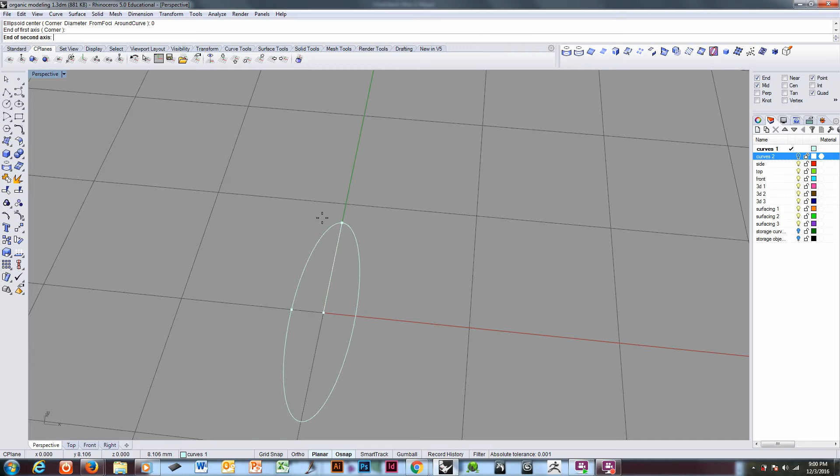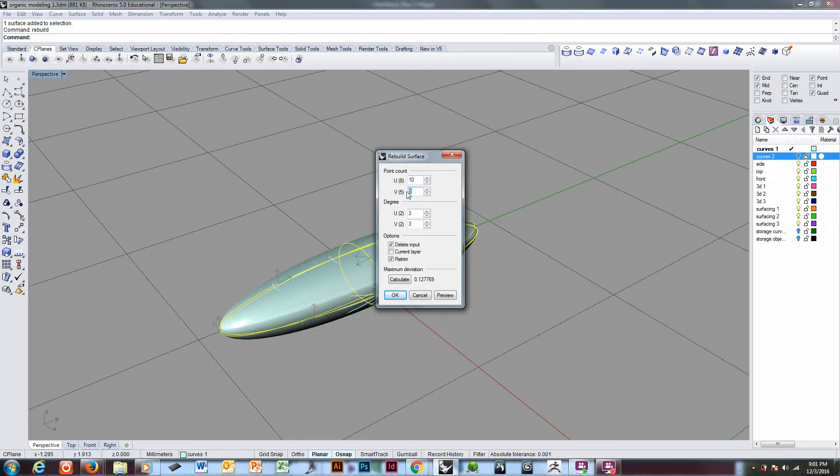It gives you an object, something like this, and then you would edit point or control point edit this object. To really edit it, you would have to rebuild it first, because the points at this level are not very useful. So when you work with a solid like this, generally you're going to be doing control point editing. You're going to need to rebuild it. Okay, so something like this.

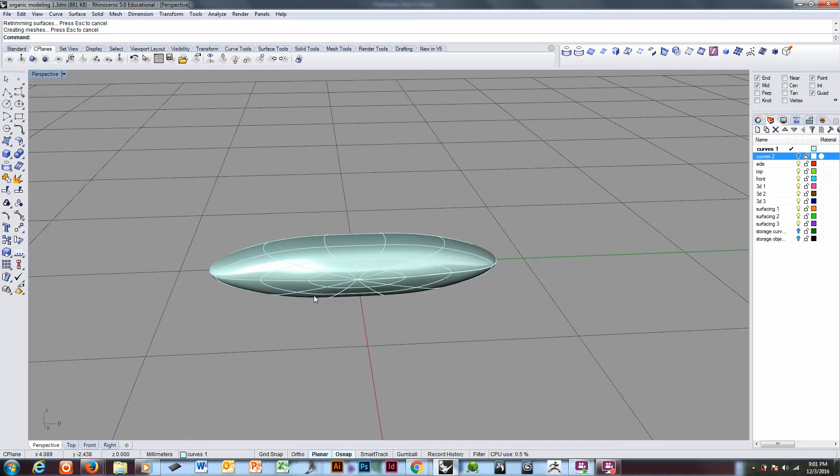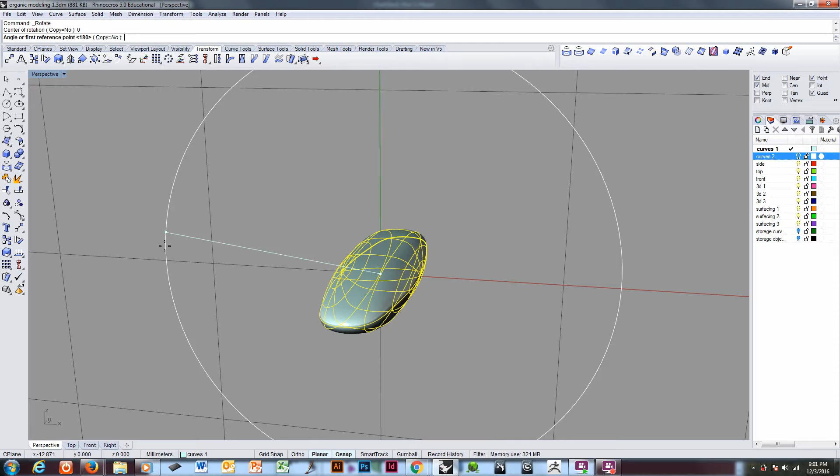And then no matter what you're doing, any of these advanced surface techniques require sub-object editing. That means control points are going to be involved. Whenever you're going to work with control points, you need to be aware of the orientation of those control points. In this case, they're rotated in spirals like tree rings from left to right, which does not suit any top-down sort of modeling. So I'm going to rotate it. That'll give me a bit better control over what's going on.

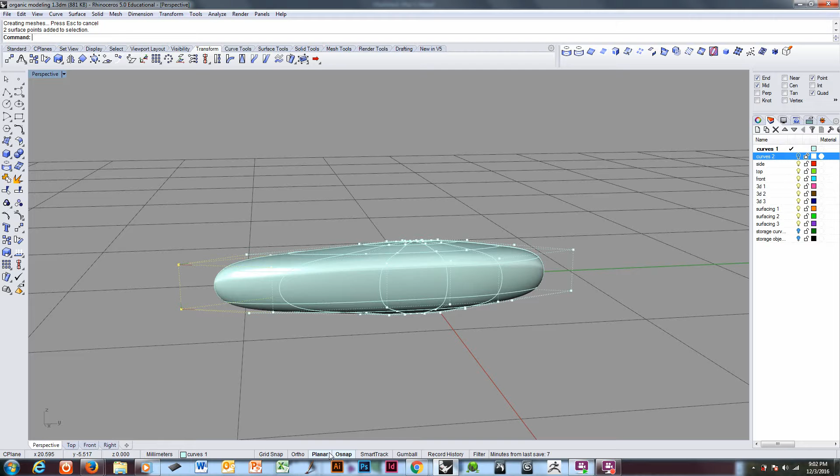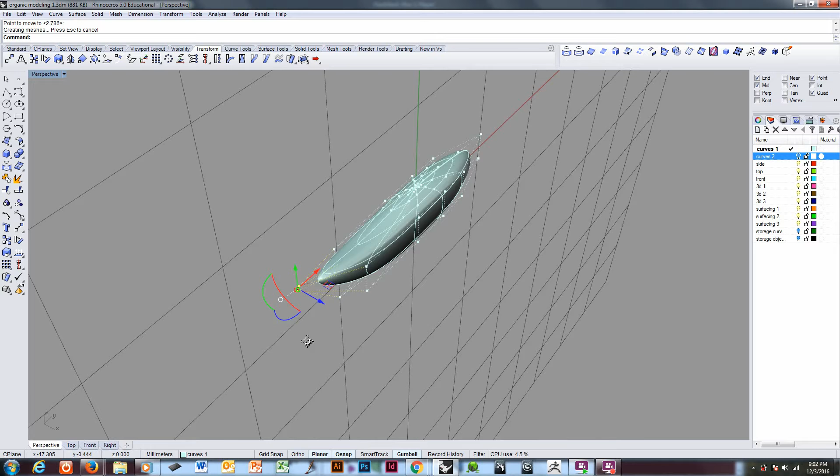And then you can take control points and edit this item any way that you see fit to get the results that you want. Alright, this is one way to create organic surfacing.

It doesn't have a lot of available use in jewelry, generally speaking. It can. You can create some elegant forms this way, especially if you're going to use the top half of the object, because as you know, most jewelry forms tend to be more or less flat backed. So if you're going to do something like this,

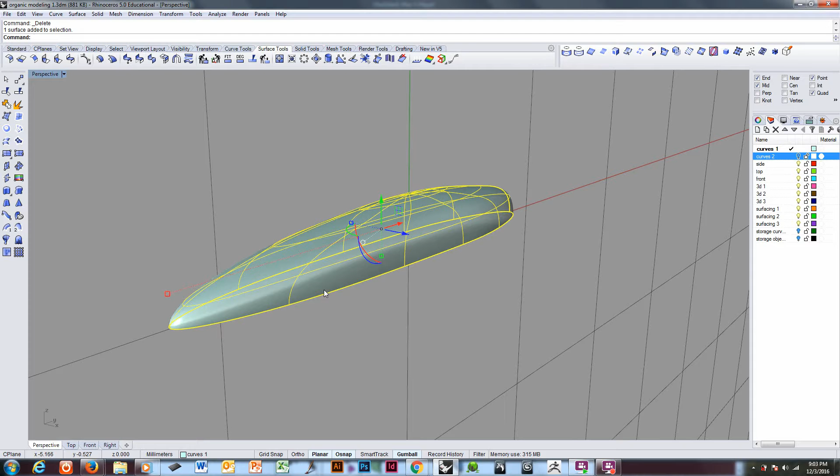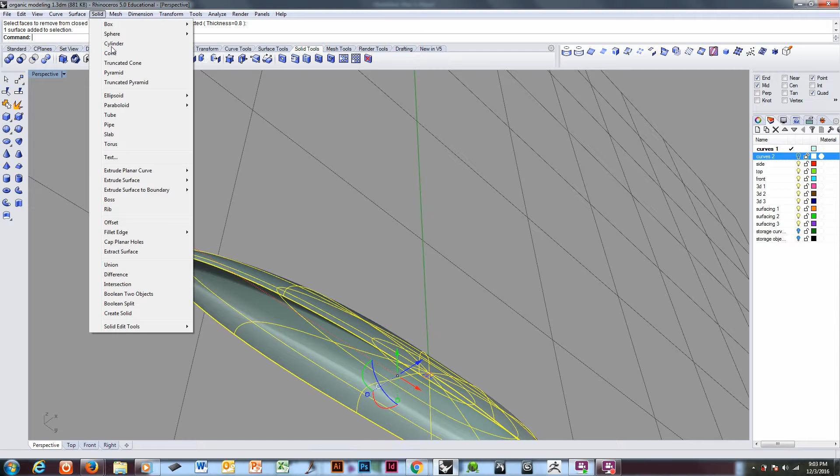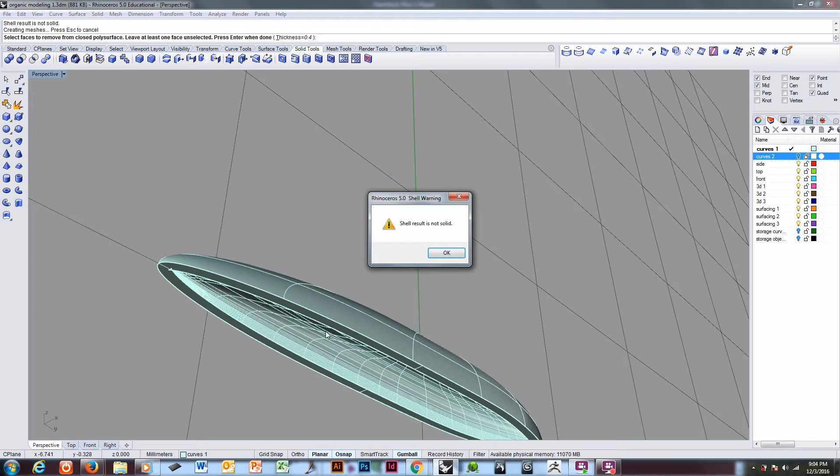let's say, to have a solid first. Sorry. All right. Okay. Shell's a flaky command, it's going to cause me trouble. We'll decrease the thickness. Okay, it's still going to give us trouble. But anyway, you get the idea, you can create jewelry forms in this fashion. Okay? So that's one.

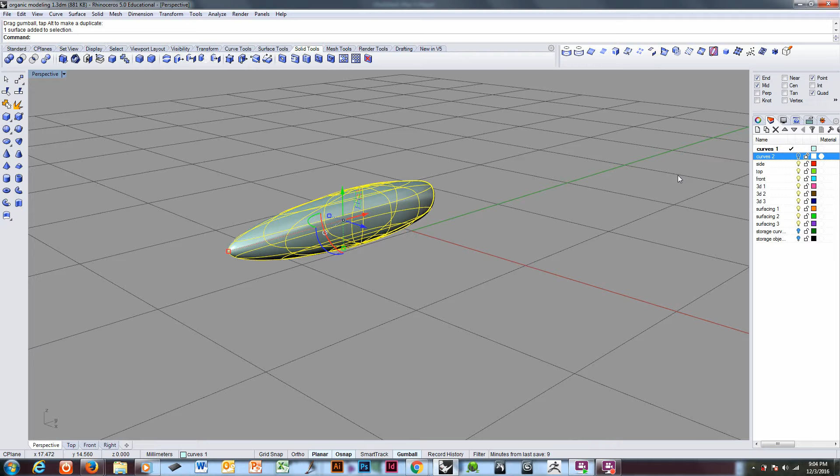Primitives that are modified. That is one way to create organic freeform geometry. Another way to create organic freeform geometry is to do a sweep. I think of these surfaces in two categories. Either a single surface, which is kind of like a sock or a half sock, if you can visualize that, or an object that has a top and sides, or top, corners, and sides.

The top, corners, and sides approach is what you are used to viewing with EFF, the extrude, fillet, and flow approach, where you extrude and fillet the corners. That is a top, side, and corner approach to something. And you can do organic forms that way, just not highly organic forms. But there are ways to do so. Anyway, I'm going to show you a quick example of the more standard variation.

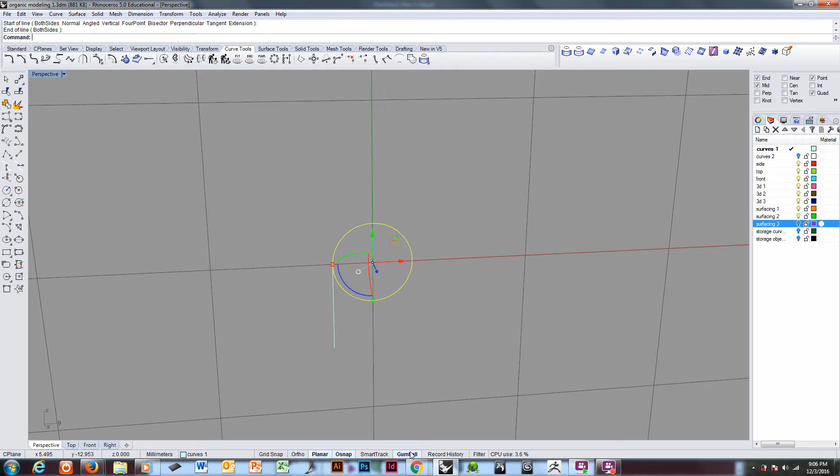I'll go ahead and draw a cross section quickly. I'm not terribly picky about what I come up with here. There. Kind of a basic cross section. And I'll make a copy of it and place it out here somewhere.

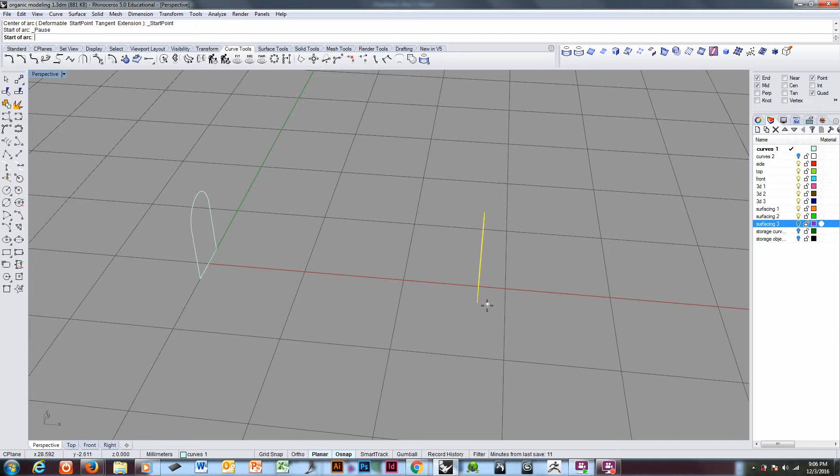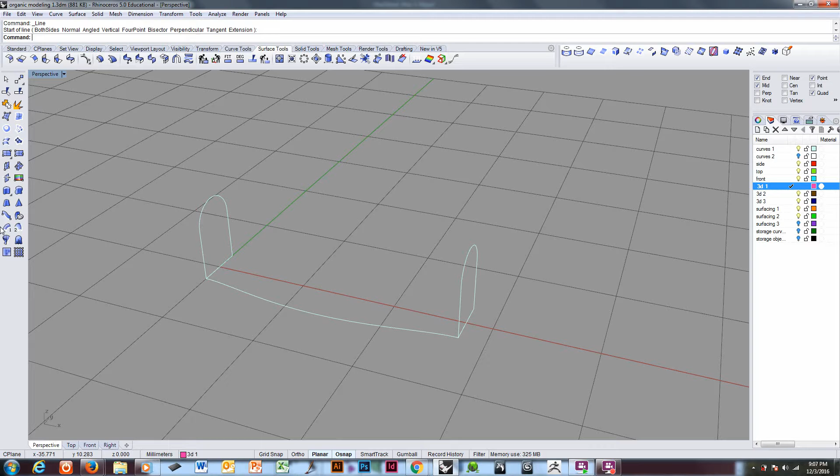And then I'm going to make some rails. These are section rail sorts of items. And I'll make it a little more organic than that, so hold on one second. Just drawing a quick sample rail. Okay, so one example of this approach would be a single rail sweep. Select the rail, select your cross sections.

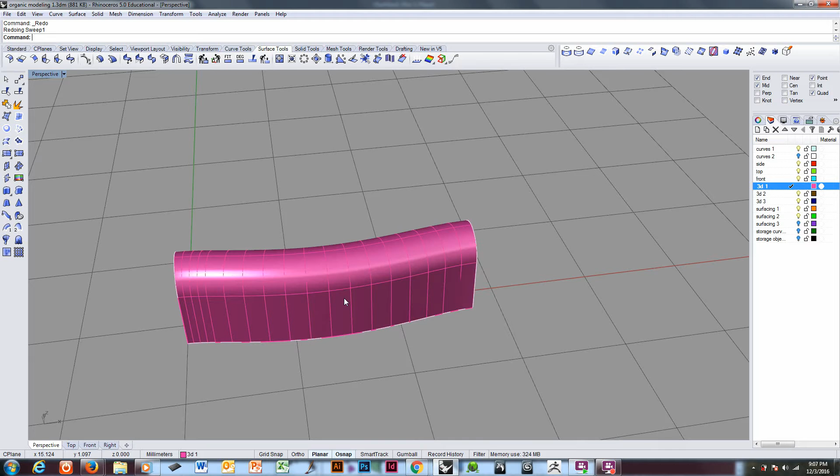And there. This is your basic kind of a sock. If it didn't have a bottom on it, it's what I would call a half sock. It's a fine way to create surfacing. One rail sweep is done when you want to have control of the cross sections, and it's a fairly simple flow of the piece that you want to do, when this will suffice for the amount of detail that you need.

If that won't suffice, say, for example, you have something happening different on the other side.

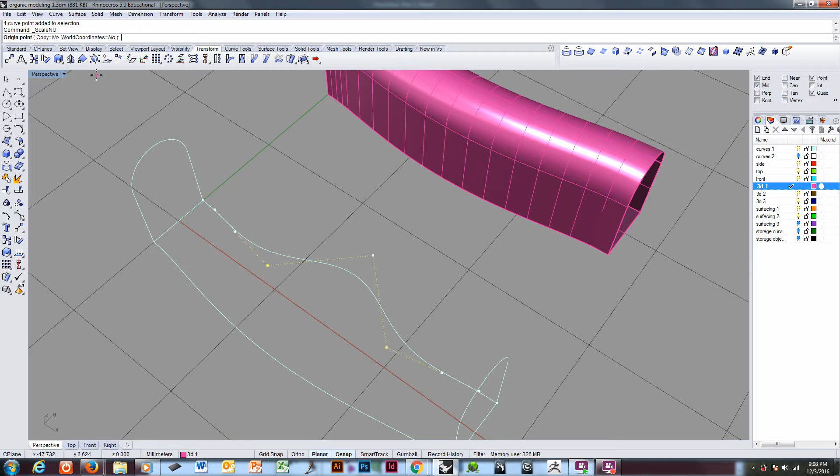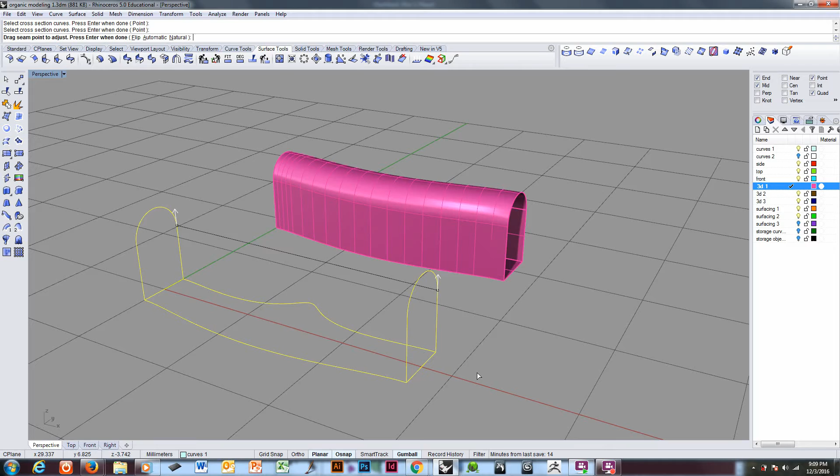I'll just use gumball for this. Okay. Then you would need to have a bi-rail sweep. This allows you to change the profile of the piece and dictate the profile in much more detail and the cross section. Once again, fine way of making surfacing. That's a bi-rail sweep.

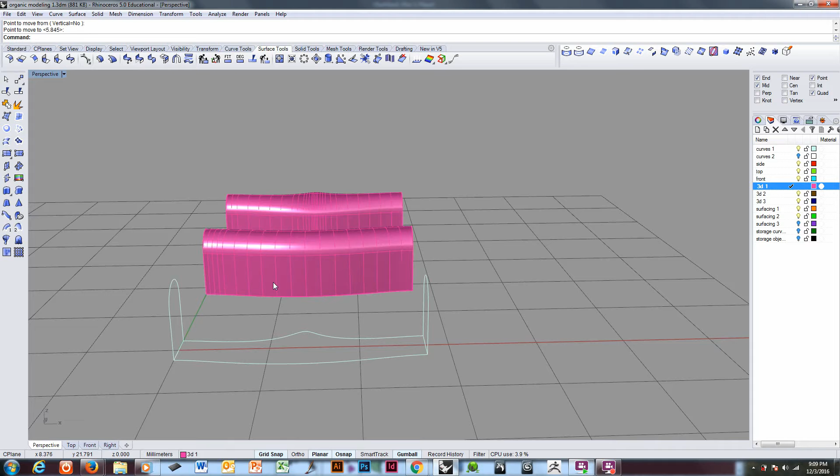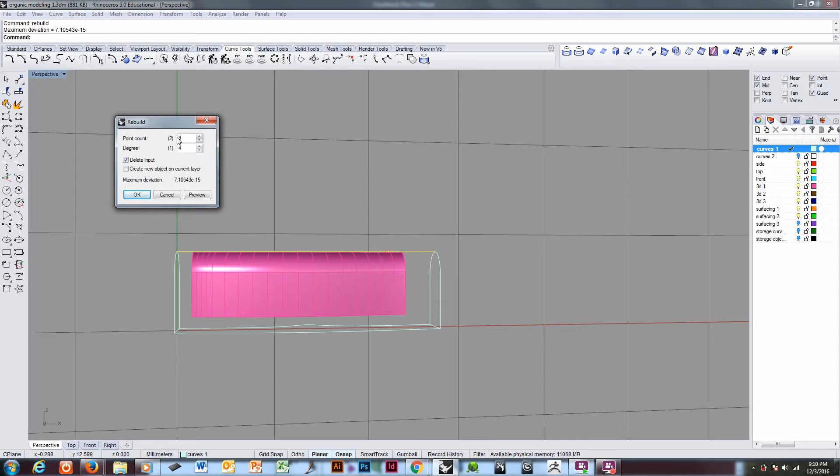And if you need even more control than this, you would do the surface from curve network. That's when you want to control another direction or dimension of the lofted surface. So actually we'll do something simpler. So if you simply wanted to have this, and we'll have it rise up in the middle.

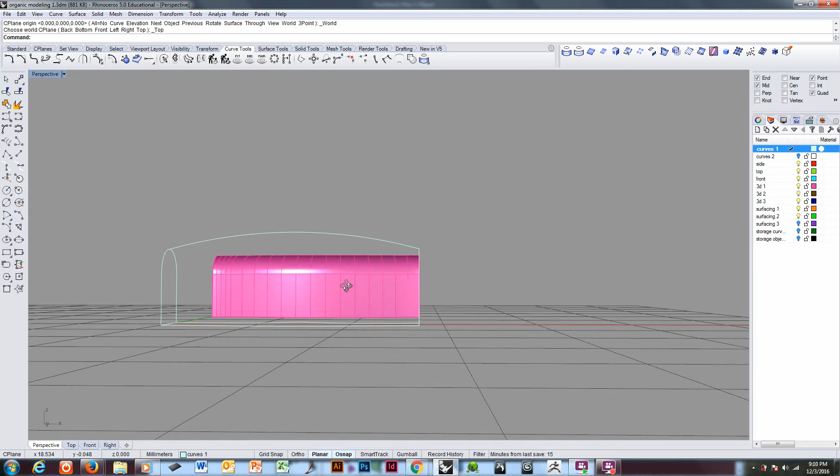If you're going to do something like this, if you want this level of control, the basic profile, shifts in elevation, and cross sections, you would do surface from curve network, which can really use an unlimited number of rails and sections.

Now it's going to cause a problem. I was going to correct it, but I might as well show it to you. Notice how it becomes very strange at the bottom. It's because I have a closed cross section. Remember, surface from curve network cannot make a polysurface, so those corners will be problematic. Again.

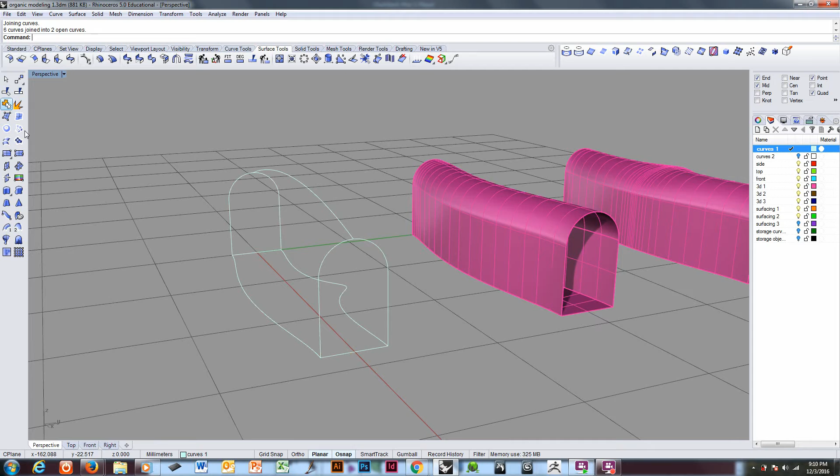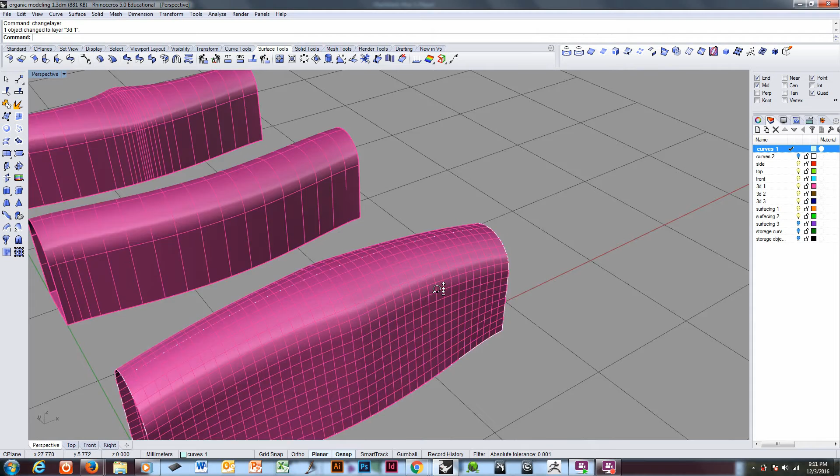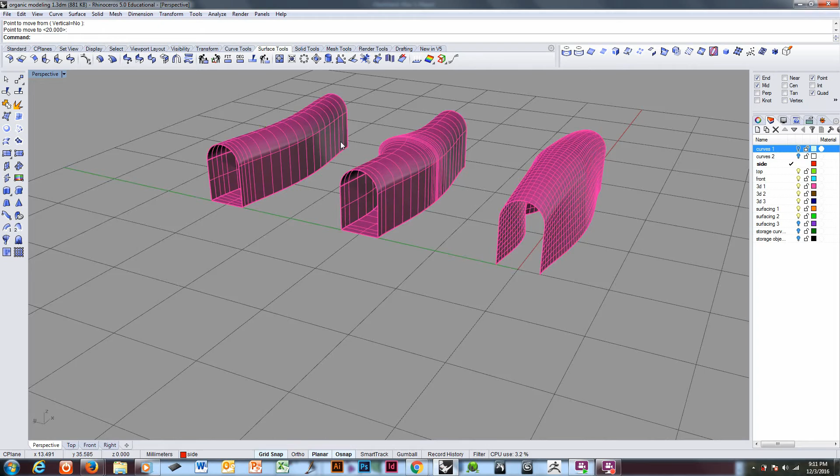Okay. Once again, a fine way to make a surface. Gives you pretty much the ultimate level of control for this approach to organic surfacing. So once again we have, let's swap the order of these two. Single rail, bi-rail, surface from curve network.

Okay, so this is the sock or half sock sort of swept surfacing. It gives you the entire piece or whatever section of the piece you're trying to create in one surface or in one command. This is likely a polysurface.

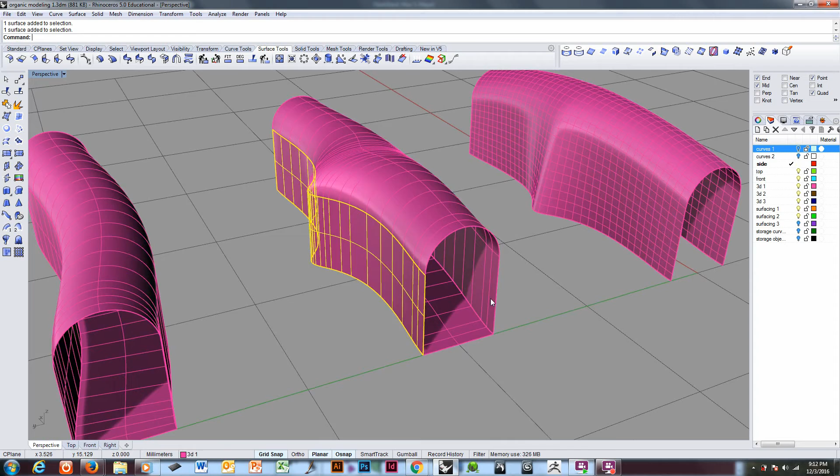Well, it has a bottom, so I know it's a polysurface, but here's Rhino doing kind of what I'm going to talk about next on its own, giving it kind of a top and side approach. It decided that this was too sophisticated for a single surface and broke it into a polysurface. It did the same thing here, actually.

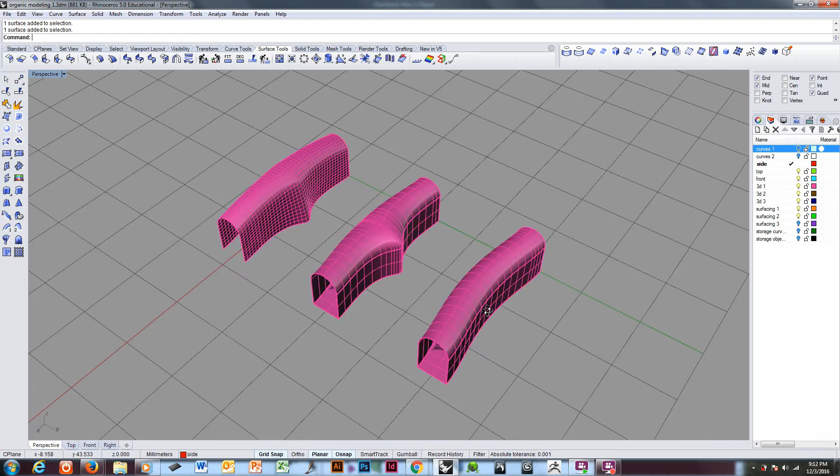Okay. This, by the way, is one of the challenges of using any of the surfacing techniques other than surface from curve network: even though it looks like a single surface, it may not be, and you want to be aware of that. But okay, enough on that topic. So we have working from the solid that we modify. We have doing various lofts or sweeps. Okay.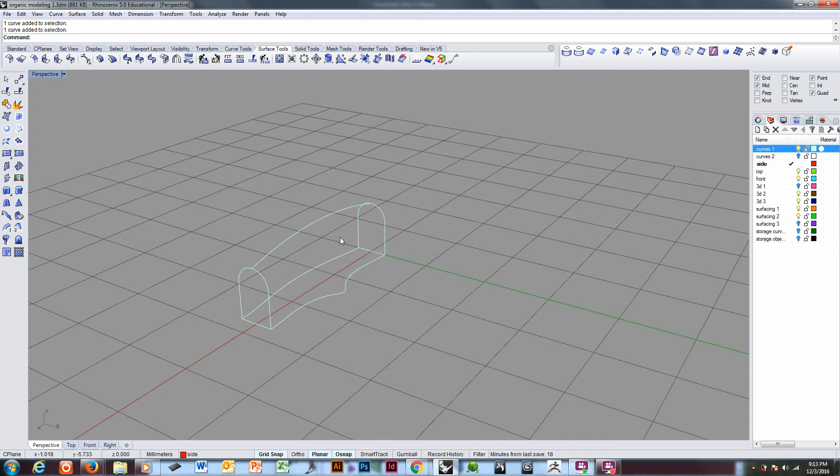Actually, I haven't really discussed a loft. I'll take a minute and do that. I rarely use it except to fill in a blank area. Okay. But a loft just uses curve information in one direction, either the rails or the sections. So Rhino will decide what to do with that. Now this is straight sections.

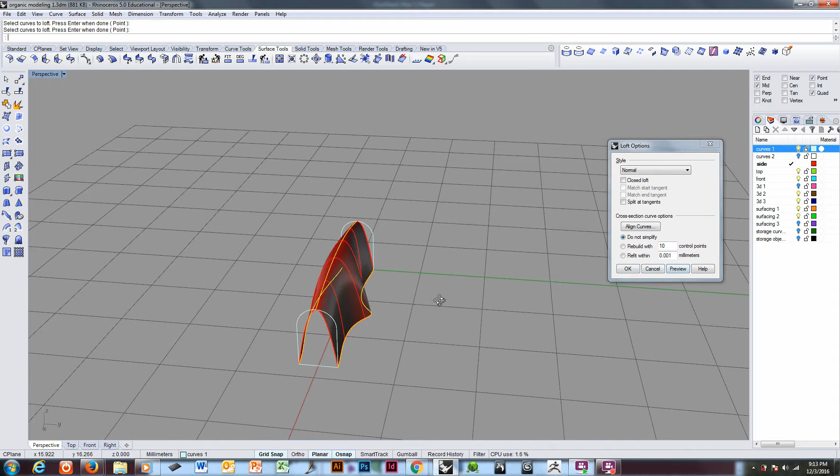Normal, it'll actually create a soft surface that connects all of these. Loose pays less attention to the curves and gives you a softer surface. Tight pays very close attention to, not the cross sections, but the rails, the curves, and can give you a slightly more pinched effect.

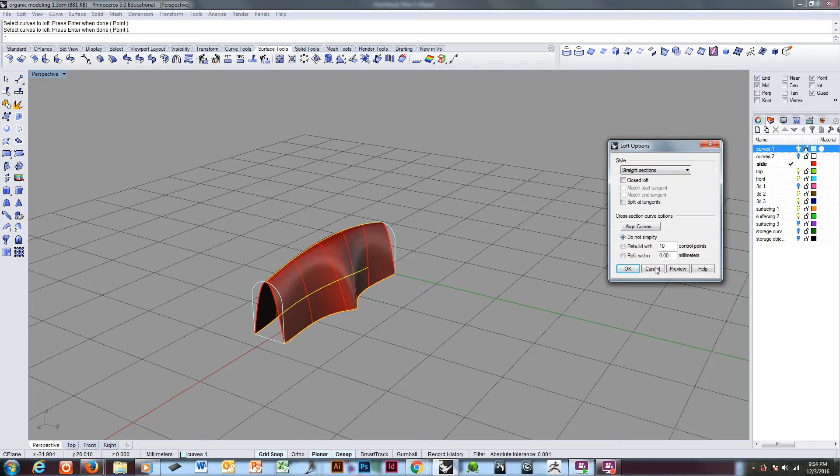Okay, and then straight sections, and then uniform and developable. Developable is a surface that you can lay out in a flat pattern. It usually gives you very crazy results. We don't bother with that. Uniform is like you rebuilt the surface to have a uniform placement of control points.

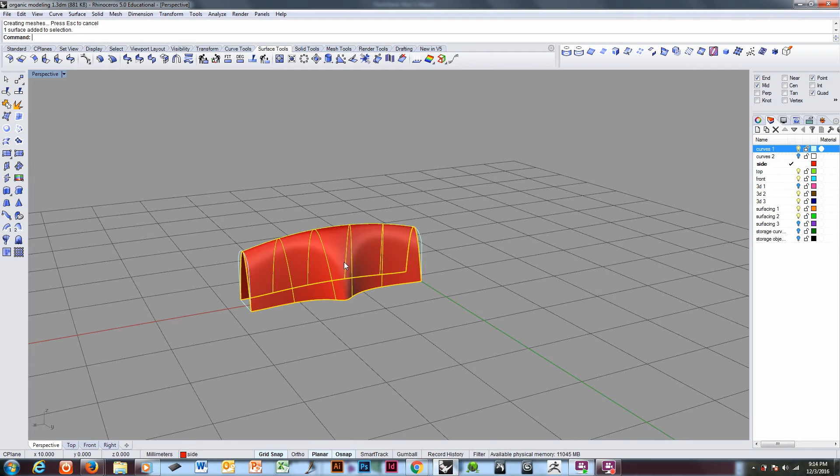So when this is done and you turn on the control points, you should have a fairly even distribution of those points. Okay? But you obviously don't have very much control over the sectional data in this direction, only this direction. And the same thing is true going the other way.

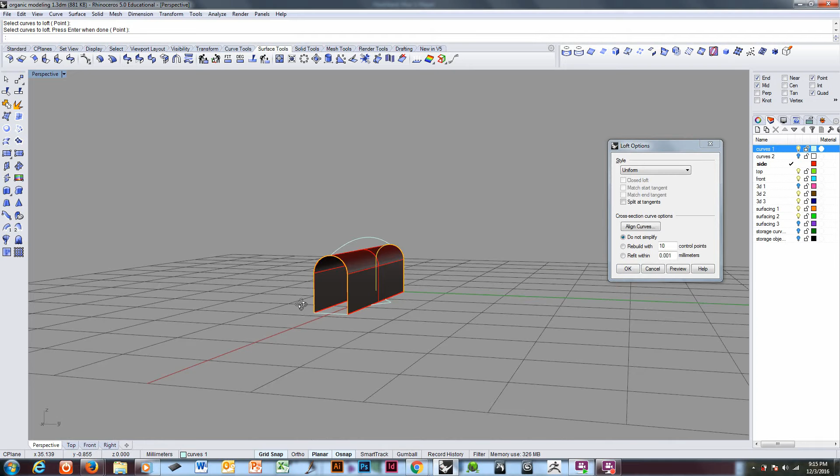If we did a loft and we went from here to here, it's basically going to give you a straight piece, because there's nothing in between. They're both the same cross section. So normal is going to look the same. Okay? But yeah, that's a loft. So lofts and sweeps. Okay?

I'm going to actually have these examples out as well of basic lofted surfaces.

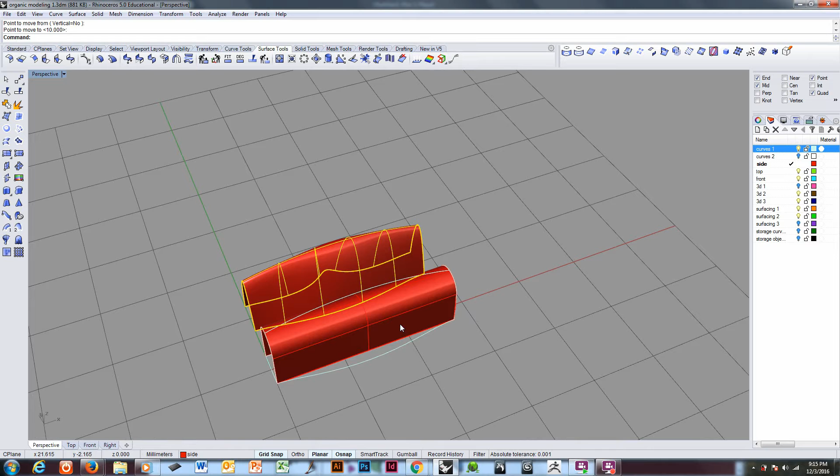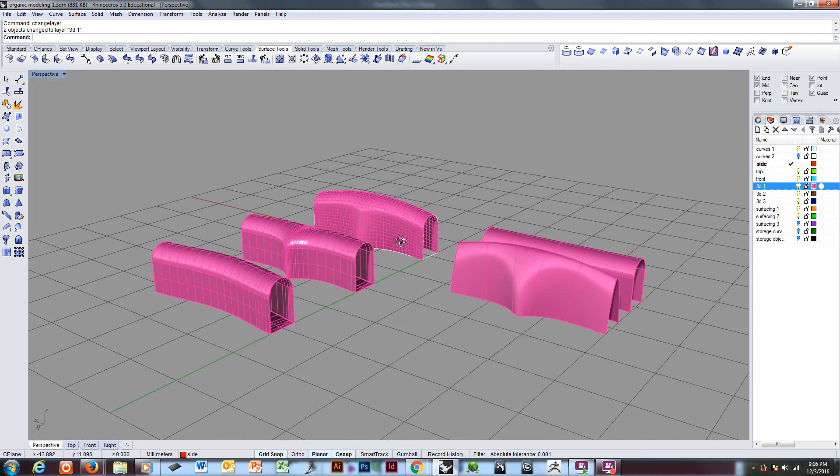Okay. You will see these techniques used a great deal in Rhino tutorials on the internet and around. They're kind of the bread and butter of organic modeling. The challenge is when you're trying to do something that's either sophisticated, well, I'll just say something you need to have more control over. If you need to have a lot of control over what you're doing, all of these can become labor intensive, trying to use history and update curves and move things around to try and get what you want.

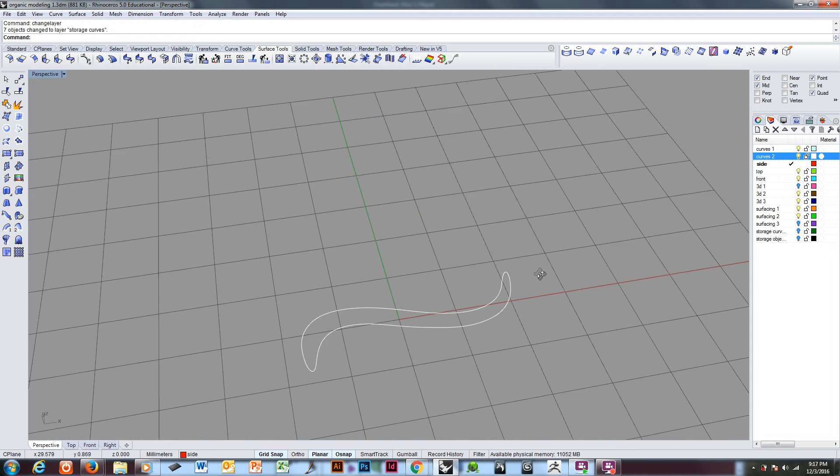It's possible. I do it all the time. But usually for more complicated pieces or elements, because I would rarely surface a whole piece in one step, or I should say section of a piece or element, usually I'm going to use something else. Usually I'm going to do the top and sides, or tops, corners, and sides. And the approach to that, here's one of my typical kind of squiggly things that I do for this sort of tutorial. This is going to look familiar to you.

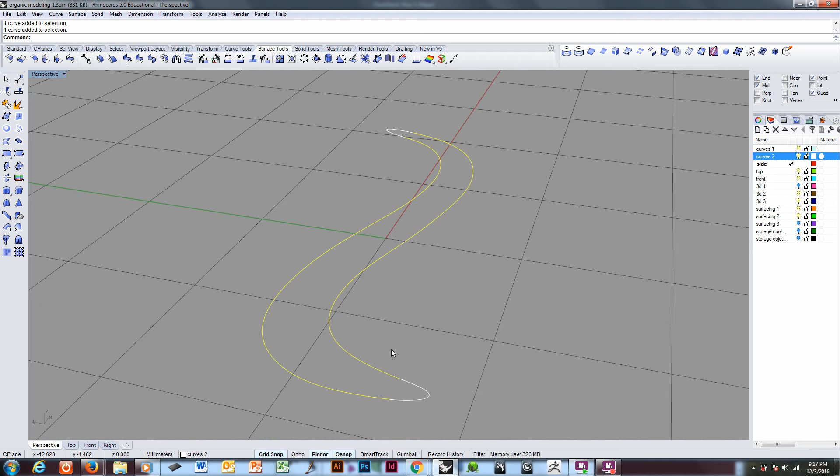Usually, I start by doing a drawing, of course, of what I'm going to do, being aware that any points will have to be handled separately. What I need is two related curves that run kind of more or less parallel to each other. What I would normally view as a rail situation in a swept surface. Okay? You don't have a lot of control creating a surface between these two. And the surface I'm going to create will be the top surface. I'll create the top surface first. It can also end up being used as a bottom surface, which we will take a look at.

So the fastest way to make a surface here is a loft, but I'm going to get very skewed surface detail. The isocurves, if you see them, they're very slanted and sheared, skewed. When you're doing control point editing, which is what all of these techniques require you to do, even the sweeps, when you're drawing those cross sections and rails, you're doing a lot of control point editing. When you're going to control point edit, sub-object edit at the surface level, using surface geometry, I should say, the grain of the surface is really important. Can't think of a better word than grain, so I'm going to stick with it.

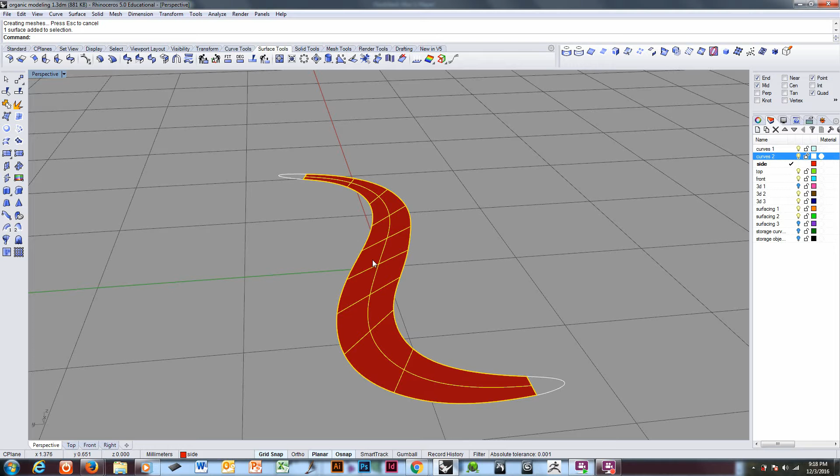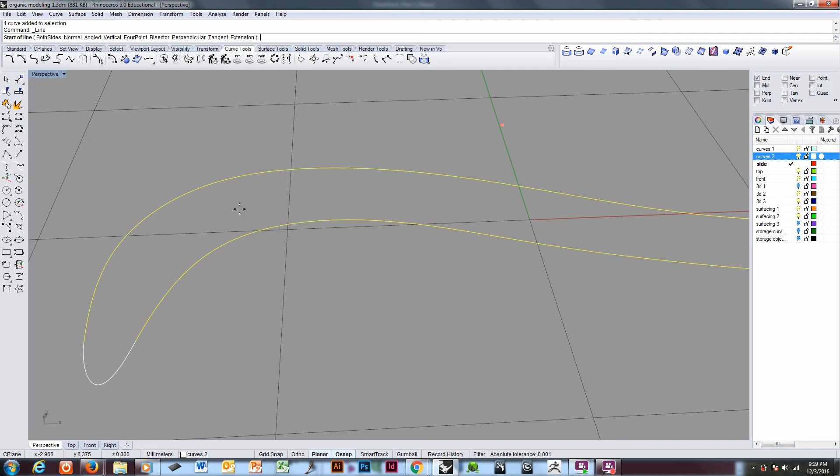You want the surface to basically be kind of a canvas of equally placed, sensibly oriented control point information. And that's very hard to get using a lofted surface. It doesn't give you enough control. So I usually create these using a bi-rail sweep or a surface from curve network. But usually it's a bi-rail sweep. Not sure what it's seeing that it wants to grab, because that's the end right there. Alright.

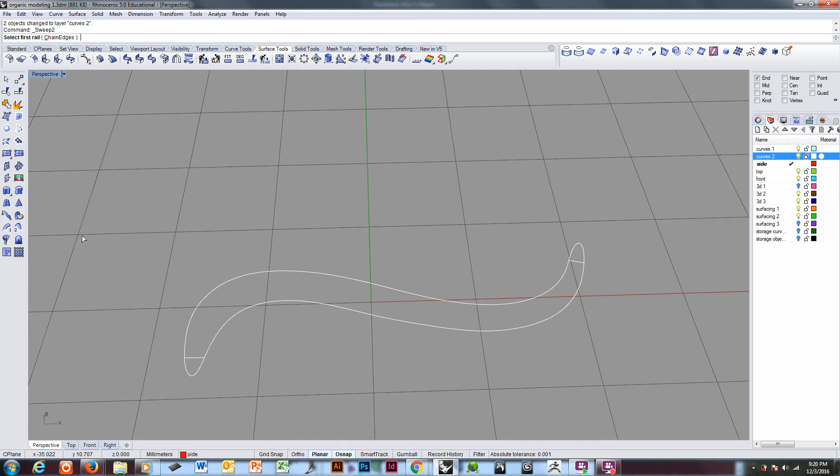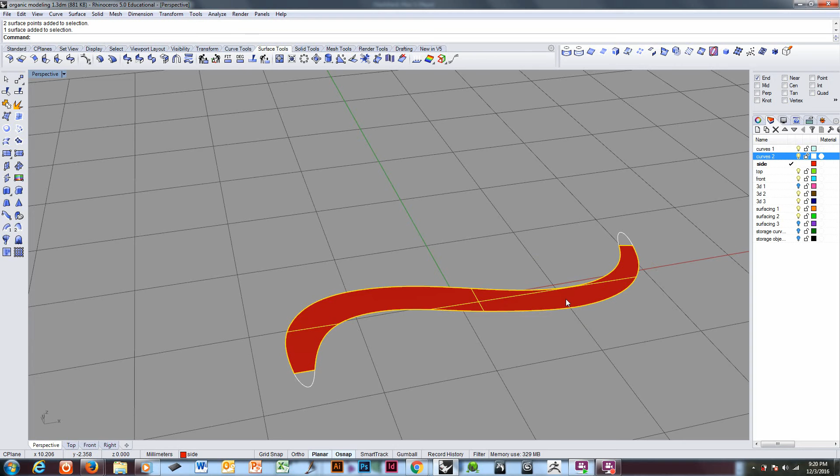Now it's a flat surface. It's a planar surface. That's an important thing to note. If I wanted to, class, I could simply pick these 4 curves and make a planar surface. Fills the same area. But its control points are useless to me. If you can see those, it has 4 control points on the outside edges because it's a square surface. Okay? Completely useless to me because I'm going to want to go in and control this. So I want a surface I can control, that I can work with at the sub-object level, at the control point level. So rail, rail, section, section.

The thing I like about doing a bi-rail sweep here is that once again I have the same skewed surface, but I can add a slash. So usually I'll come into the middle and I'll add a slash that looks more or less perpendicular to both curves, both rail curves. And you see that gives me iso curves going in a more proper direction, and I will do this as many places as I need to direct the flow of those iso curves in a way that makes sense to me.

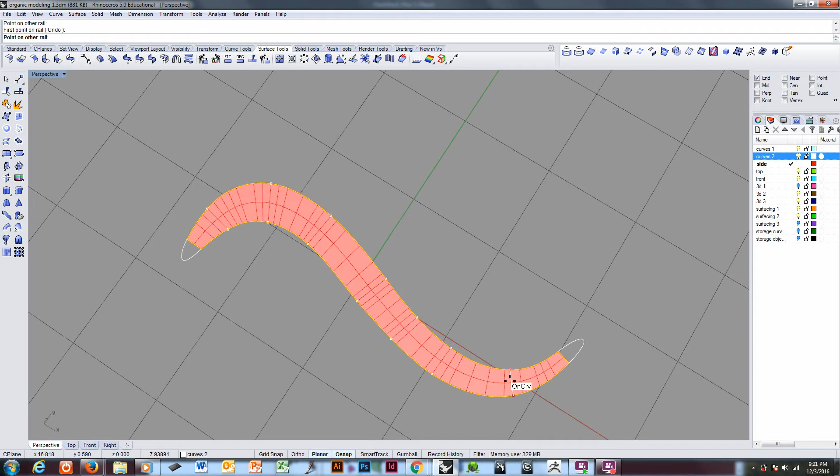Because these will be my canvas. These will be my clay. If they don't make sense, I'm going to be struggling. Hit OK. Problem is now I have a surface that makes a certain amount of sense, but the other thing I want is I want evenly placed points. That's important to me. I want an even distribution of points.

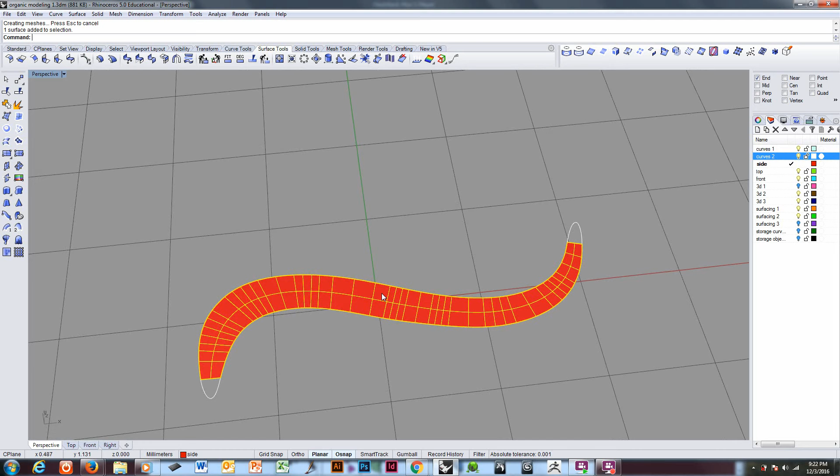Okay, so I will go ahead and achieve that now by rebuilding. Right now it's 67-2, 3 and 1 as far as the degree. Third degree means it's organic with a whole lot of control going along its length. 2 points with a first degree surface means it's a flat surface with a control point at each side. I don't want that.

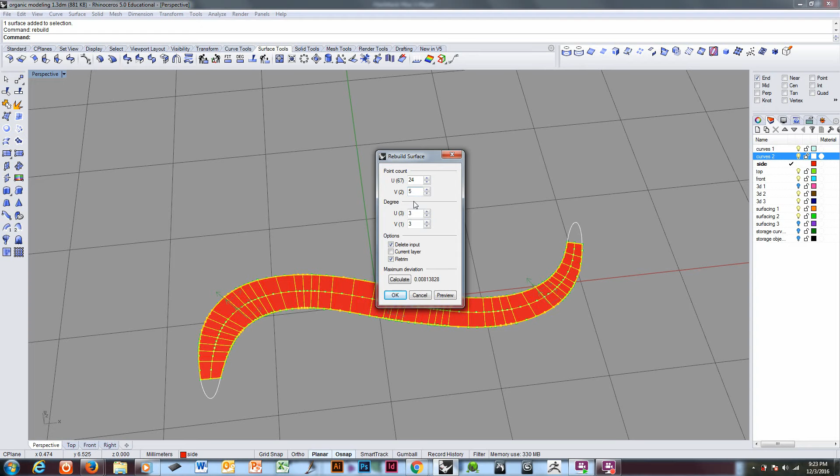So I think I can handle this entire length probably with something in the vicinity of 24 points. And I want 5 points across. 1, 2, 3, 4, 5. That'll give me a little bit of control over the form here and a center row of points. I like third degrees for surfaces. I always say fourth degree for curves, but when I'm surfacing, I do prefer Rhino's default of third degree surfacing. And I'm going to hit OK.

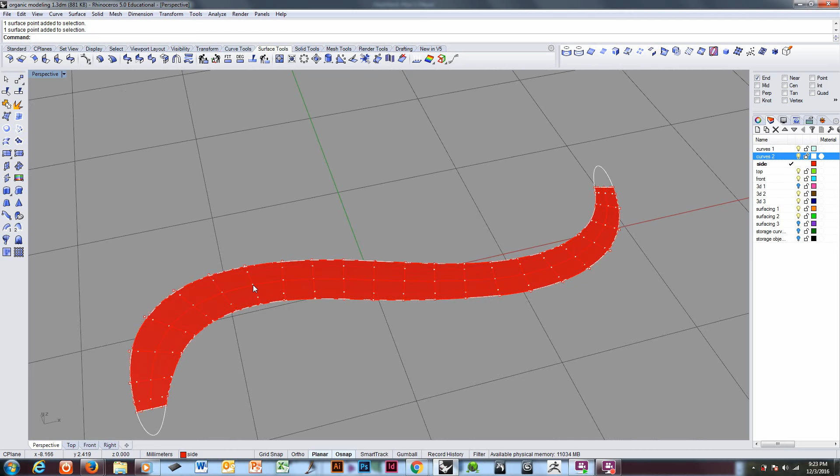And you'll see that gives me a very consistent surface. If I turn on the control points, they're very predictable. They only get a little bit crazy at the end, where Rhino always adds that separate, extra row as an anchor. And I can delete those if I want to, but I leave them usually. They don't get in my way with surfacing near as much as they do when I'm drawing. Okay? So there's my surface.

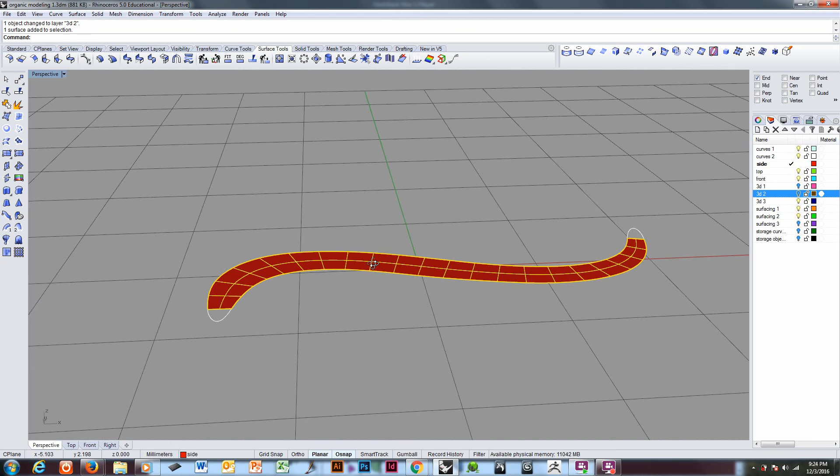This is my top. In case I want it for a bottom, I'm going to Control C, Control V, so copy and paste. And I'm going to put this on a layer for storage where I can get it back later if I want it. Okay? So that's my top. My sides, I can show you how I will generate them, but you wouldn't normally generate them at this point, but for the continuity of this video I will do it.

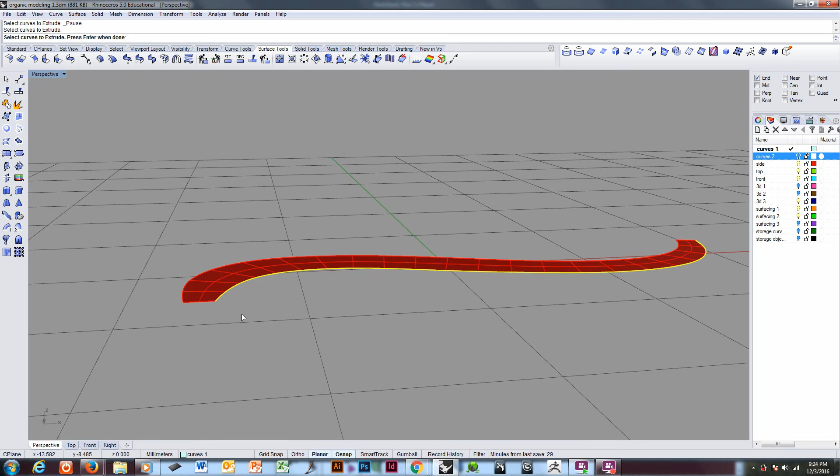My sides are going to be extrusions. Okay, so I can just extrude, and I don't want to use the curve. I want to use the edge of this surface. Now in the video for the bypass ring of mine, I didn't do that, and there was a good deal of shearing in the surface. I didn't worry about it because I knew what I was planning to do, but it's poor form for many things that you'd want to do. One side only. And I might as well select both sides and do them together.

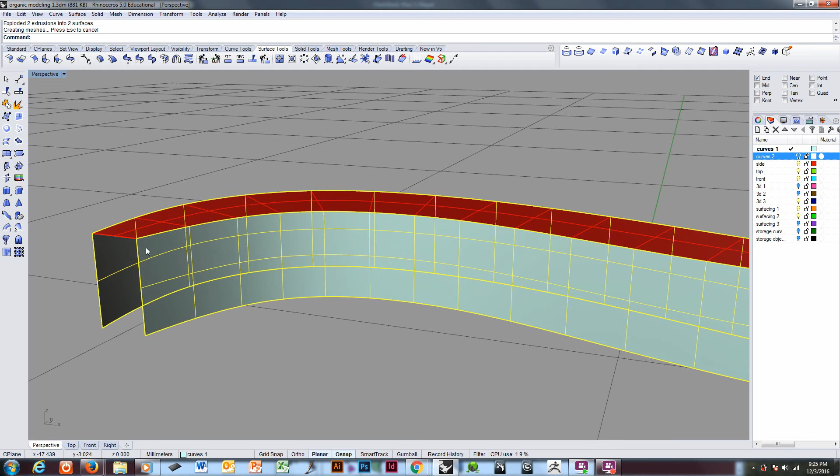Okay. The importance of extruding from the surface is you'll notice that the iso curves, the control points, all line up. That makes your life so much easier. These are extrusions. Before I can turn the points on, I have to explode them. That's a fluke in Rhino 5. I don't know why they require you to do it, but even though these are each single surfaces, an extrusion is considered kind of a compound object, and to access anything in the surface itself, you'll have to explode it first, which is what I've just done.

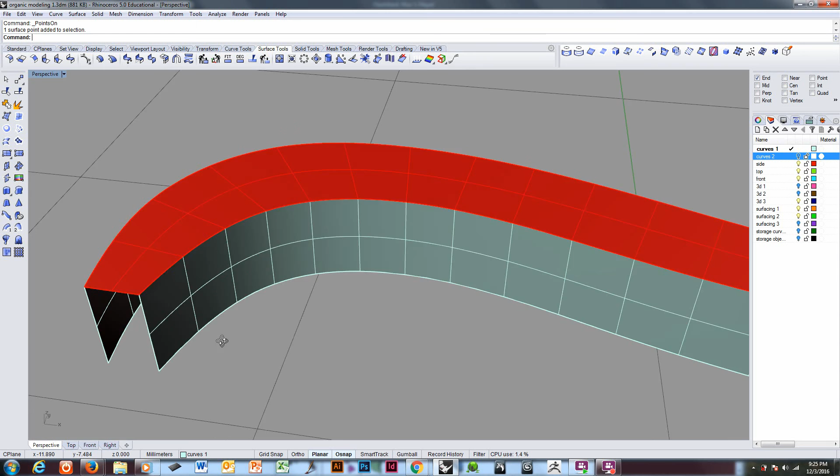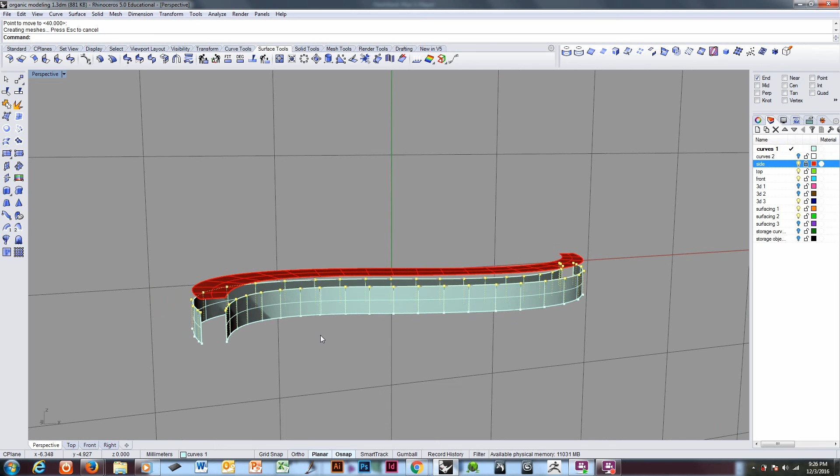There. Now I can turn on the points, and you'll see that the points here are lining up with the top surface. That's very important. And then generally how this system works, and we'll go into much more detail in another video, is I will grab the top rows of the side surfaces, lower them, and then match surface.

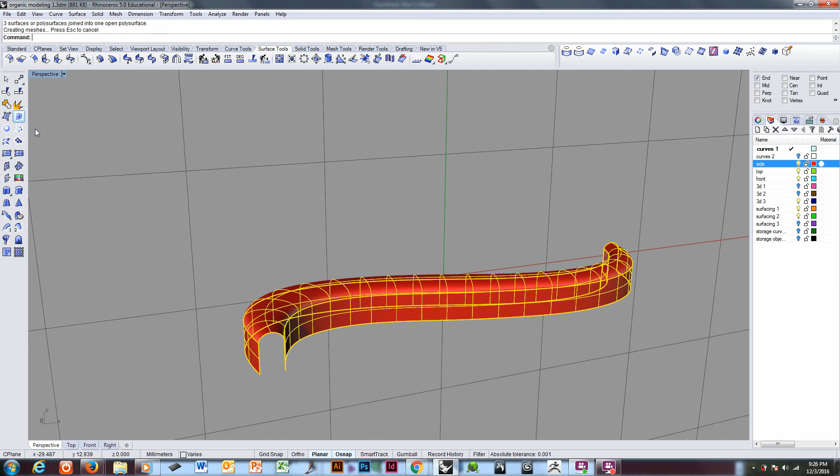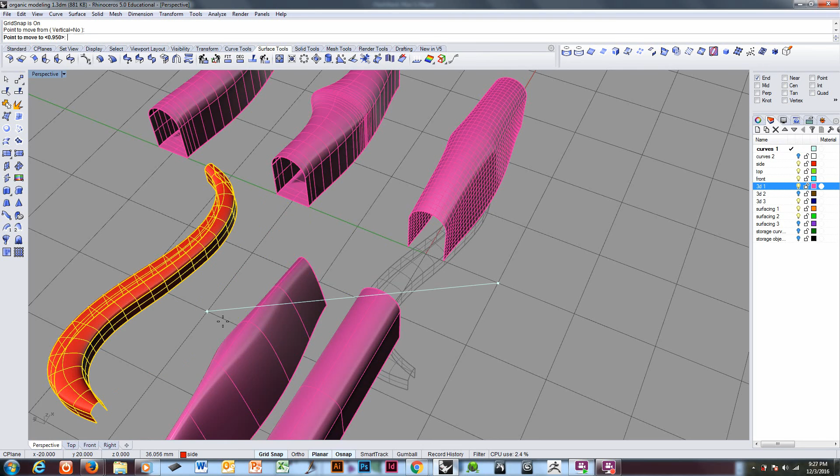And that will give me sides and a top that are quite smooth. Okay? So this would be another method of getting organic surfacing when you want to have more control than some of these other methods allow.